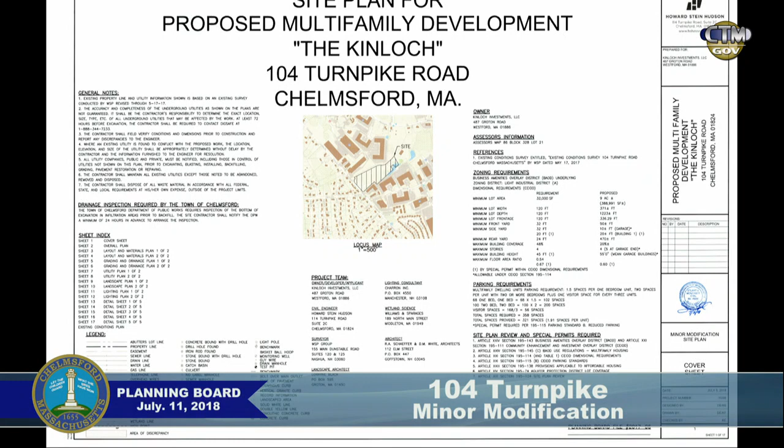All right, thank you. Good evening, everyone. Katie Enright with Howard Stein Hudson here tonight to present a minor modification for 104 Turnpike. The first and most important thing is we are now looking to call it The Kinloch instead of Turnpike Woods. So we've been working on a name and have come up with that, so we'd like to change the name for future records.

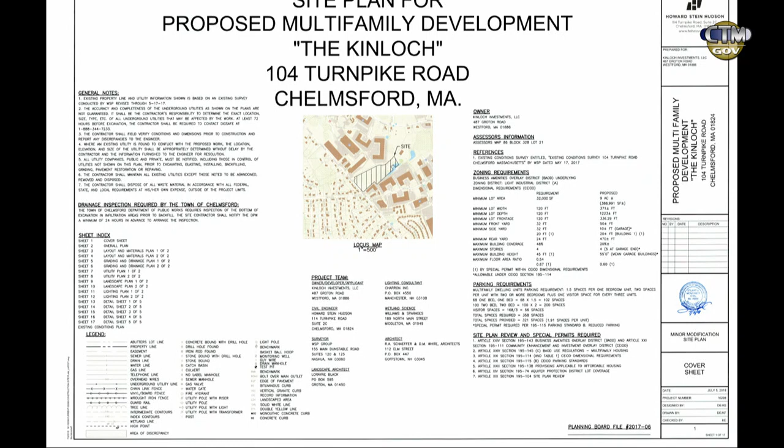Also, we have worked through some construction drawings. Essentially we've hired a new architect to work through the construction details. So there's been some minor changes to the documents related to architecture and some minor revisions related to grading. You're not even going to really be able to tell when we're looking at it online. We brought it to Evan. Evan thought it was important that the board see it and approve it in a formal manner. So just to look through it.

This is the layout that we've proposed to you today. If you flash between the two layouts, that's the one you approved previously, and this is the layout we're at now. Really minor changes. All the footprints of the residential buildings got a tiny bit smaller. The garage footprints, though, got a little bit larger. We've lost about 5 surface parking spaces, so our ratio's gone from 1.94 to 1.91. Not a very big deal, but again, we required a special permit for parking previously.

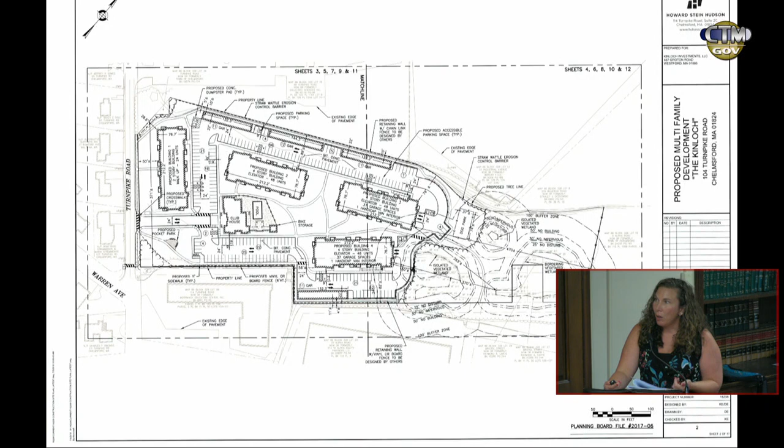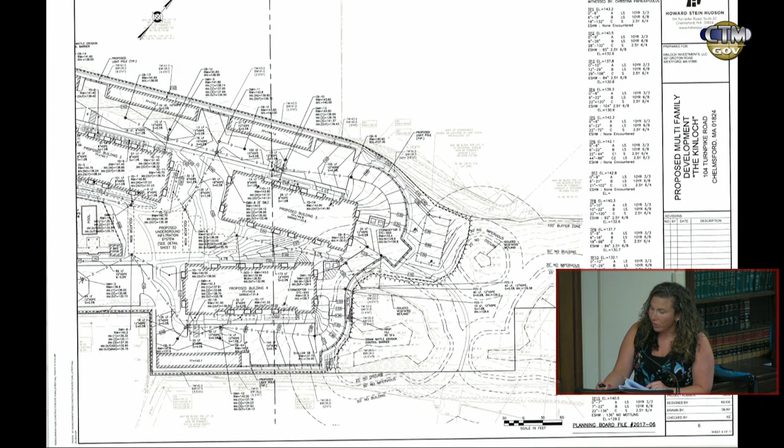The garages have gotten a little bit longer to accommodate some ADA space within the garages, and we've lost a couple of parking spaces. With the slight variations in building, we had to basically rebuild the plan a little bit, but as you can tell, it's very consistent with what was previously approved. We've also done some grading modifications, most of them at the rear here. Essentially, the walkway between buildings 3 and 4 wasn't ADA compliant, and where we had amenities on the other side of the driveway, we worked all of those grades back to make it ADA compliant in that area.

And then these are the new elevations for the buildings. So I've given you kind of what was done before. This is what was approved previously. Again, it's going to be hard to kind of tell the differences. This is what's proposed today. Different architect, different program. Materials are a little bit different, but when you look at the peaks on the roofs, the peaks are a little bit different. But again, very similar to what was previously approved by the board.

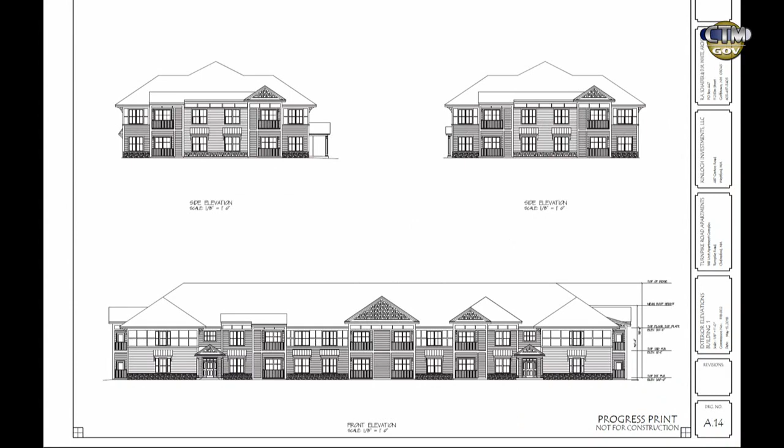Again, same thing with the 2-story building. This is the new 2-story building. This is the old 2-story building. Again, very similar. Go back and forth. They're just in different locations on the plan, so it makes it a little bit confusing. You can see there's a few less peaks on the 2-story building in the new plan versus the old plan. Again, very substantially similar.

We loved the architecture before. We wanted to move forward with that. As we're working through construction details, there's been some modifications, and Evan thought it important to bring this before the board today. And that covers it.

We gave you a very detailed rundown in the letter that called out every specific little detail. One of them, a little bit of the drainage changed, but again, the impervious surfaces stayed the same, so we might have added a catch basin here, taken one out there, a couple new yard drains. Very simple stuff that we would look to work with the engineering department upon final review before construction to make sure that engineering is all set with all the final details. So with that, I'd like to ask if there's any questions or concerns.

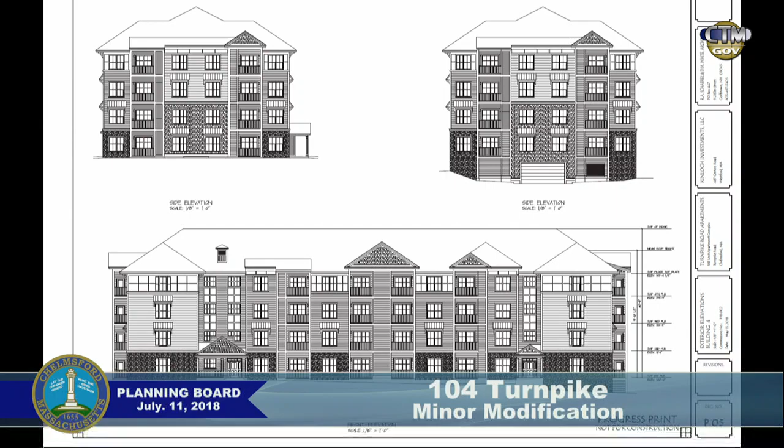Could you flash this one back on? This is the old. Yep, this is the new. Back to the old. Yeah, you've lost a couple of balconies. Katie, by chance, do you have a list of architectural changes that have been made? No, they're all very little tweaks, and I can't tell you exactly which peaks they were. I can kind of speak to it.

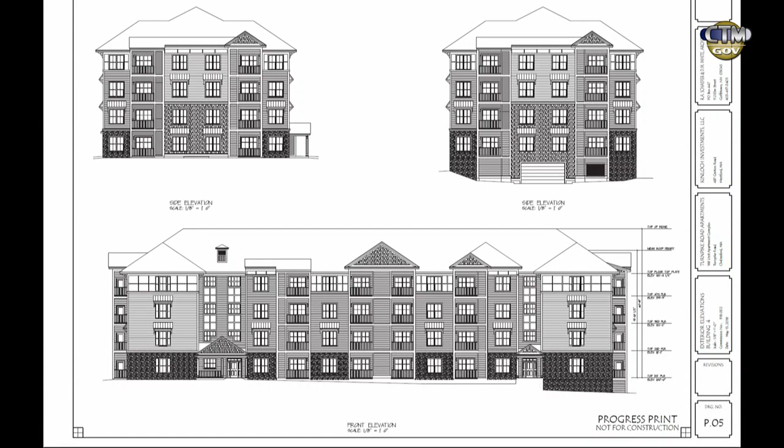Dave Guthrie, the applicant. We maintained the number of balconies. Okay, I wasn't counting right. We consolidated some gables in here. This is a double layered gable here. We kept some of the hip here. We moved this one to a shed just to kind of break up the monotony of the gable running all the way down the line. We kept the stone at the base layer. We kept the siding exposure from 4.5 back to 7.5. We mixed that up. We added some shingles up here on some of the peaks.

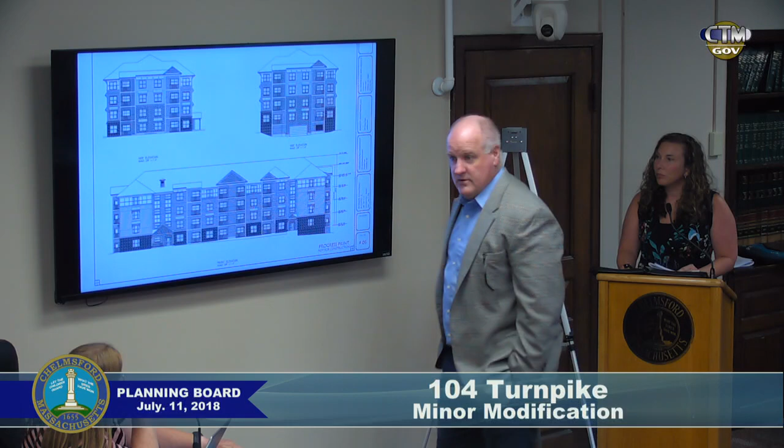There were some other miscellaneous structures up on the roof that we removed. We kept some panelization in here. We eliminated the venting system that was on the exposed face to get into more of a streamlined, modern HVAC system that allowed us to vent in a little smaller space, a little more consolidated than the big panel there. Gotcha. Sort of subtly slid it from 1899 to 1911. A little bit, yeah. We still kept the hoods. We were fond of the hoods, and we felt like the board may have been fond of the hoods.

Yeah, I think maybe they were there previously. We kept that standard, we kept that stuff in there. It's very subtle. So a lot of the features that were on there before we liked. We just needed to get rid of some of the undulations in the building a little bit. Okay, that's fine. This architect gave us a chance, we love the old architect, so let's not say anything negative there.

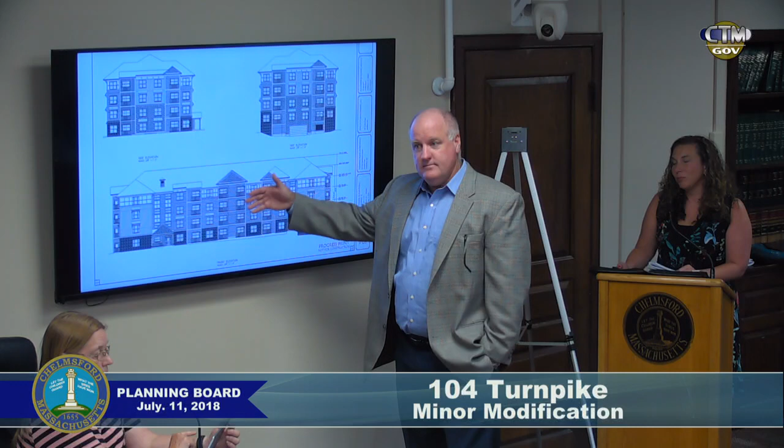This architect gave us the experience in stacking units over each other. So if you have an A1 here, or let's just say a two-bed in a certain style here, it's standing over a two-bed certain style right below it, so our plumbing lined up a lot cleaner. That makes it easier. It just simplified things from a construction standpoint. When we went out originally with the conceptual plans that were approved by this board, some of the construction numbers came back substantially higher than really was feasible.

They had suggested a couple architects, we interviewed them, we picked one, and sort of streamlined the process. All right, gotcha. We certainly tried to maintain or enhance most, if not all, the architectural detail that I think the board liked, while creating some construction efficiencies. Well, I've had my say, so let's hand it around.

You want to take a shot? The building heights are the same? Yes. Thank you, I'm all set. I'm good. There's also some shifting of driveways and rows, shifting at all? Yeah, very little. The front building had an overhang that went out a little bit further than the previous building, and we wanted to maintain the 50, so that pushed back a little bit. But we're talking a couple feet here and there, nothing substantial. So there's been a little bit of tweaking. Essentially, we rebuilt the same site plan with the new buildings.

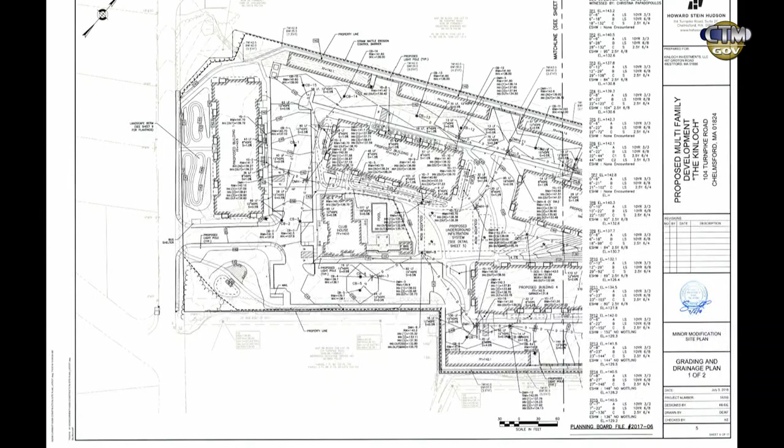And in addition, you're also seeking a waiver of the fee? Yes, please. Tim? I'm good. Henry? Landscaping plan staying the same? So it was changed a little bit just because it was tweaked. I had Lorraine work all the way back through it because the doors changed location, which means it screwed up all the plants around the buildings. So she rebuilt the plan around the new doors. And because the door at the front building that we wanted access out to Turnpike also moved, we split the berm in two. So there's now two berms in the front with the walkway in between them rather than having one long berm and the door at the end.

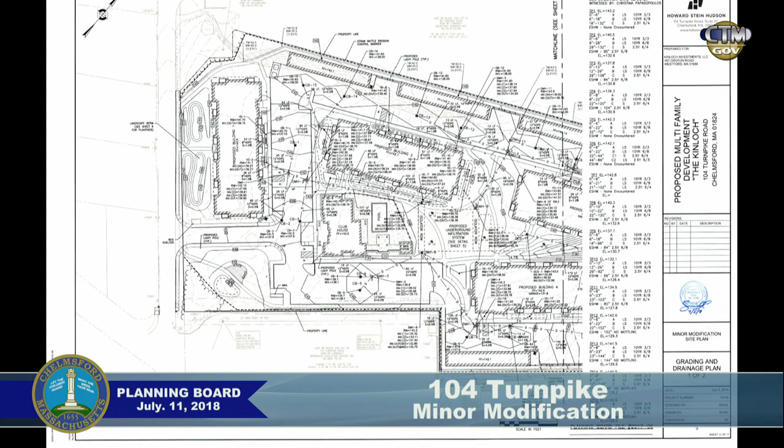Gotcha. So we had her replant the whole thing in the same style as she did before, shifted a little bit. No fewer plantings? No. Nan? I'm looking. And the lighting and everything stays the same, correct? Exactly. Has Christina reviewed the changes in the drainage? No. Is there any change in the drainage? It's really little minor tweaks. So I prepared a letter. Basically, I can just read it if you want, or do you want me to summarize?

So I received the plans, and a technical review of the site design and stormwater design is not complete. This office has no major concerns with the proposed revisions due to the minor nature of the modifications. Please consider making it a condition of approval that the applicant must revise the plans in accordance with the requirements of the engineering division prior to receiving a building/foundation permit. Okay. Any other commentary? Anybody? Question. Go ahead.

Katie? Yep. Can you save me some effort and tell me where the pin oaks are? Oh gosh, no. I cannot. You know the drill. I have no idea where they are in the plan.

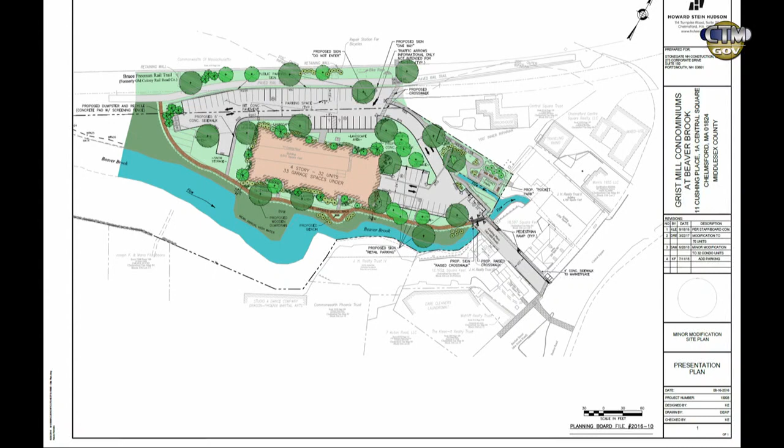The previous approval was for 70 apartment units at 4 stories with an underground garage, making it a 5th off of Cushing. The new project is the same exact height as the previous approval, so we don't need any additional relief for that. The plan also provides all of the same public amenities: the same landscaping along the bike path, same number of parking spaces along the bike path for visitors and the public, and the same amount of spaces for Jack's retail spaces out front, following the license agreement for the 19 spaces closest to his retail units on the bottom.

We're also providing a slightly larger parking ratio for the number of units, and decreasing the impervious square footage from the previous site plan by over 19,000 square feet. So there's a significant amount of green space on this project. We've kept the building the same distance from the brook. The brook walk is in the exact same place with a few minor tweaks. Because we didn't need as much parking, it's connecting to the bike path a little sooner than the previous proposal, but essentially the flow is the same.

The traffic is obviously significantly reduced from what was previously proposed. The traffic flow is exactly the same. The improvements to Cushing as part of the MassWorks grant, exactly the same. Connectivity to the Central Square area is exactly the same. The Pocket Park is exactly the same with the walkway, and the landscaping has been substantially increased due to the amount of green space on this plan.

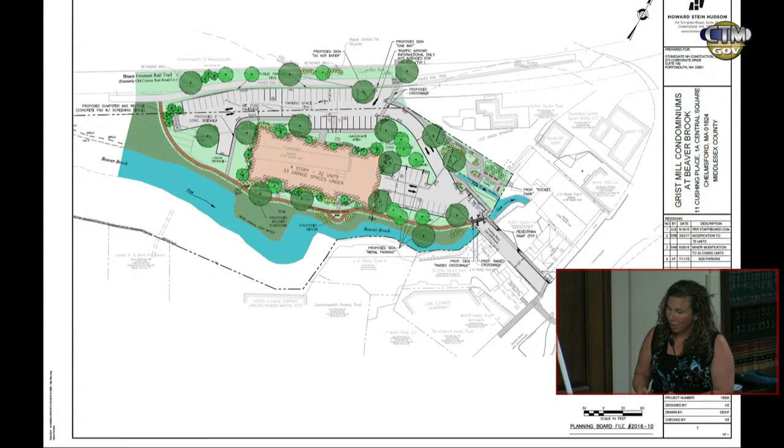We were given the approval for a $360,000 inclusionary housing payment, and we are not going back on that; we are keeping that as the contribution for this project. Obviously, the 53G money will go down a little based on the number of parking spaces. There's still the $10,000 fee related to police and the improvements in Central Square. It's very much substantially similar to what was previously proposed. It's just gotten so much more open, green, and walkable. The grading is essentially the same. The drainage is essentially the same.

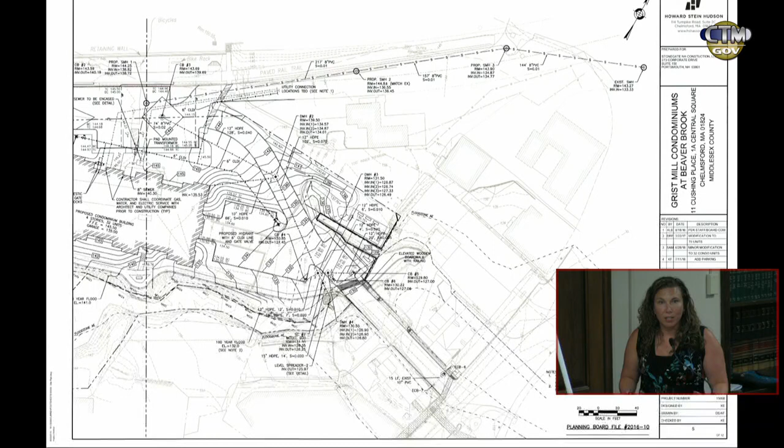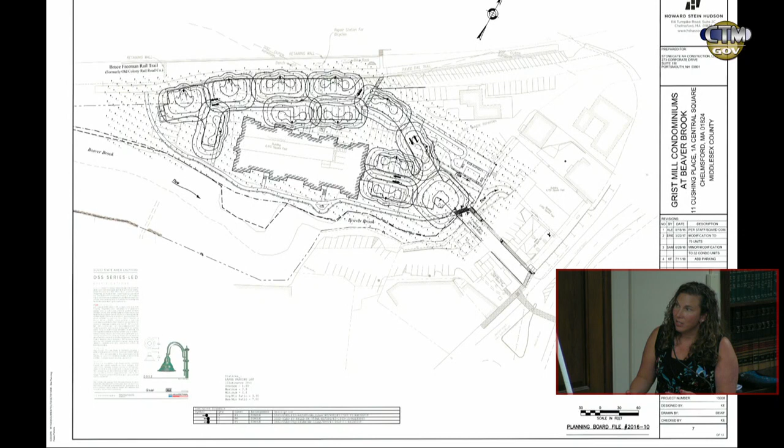We're substantially decreasing over existing conditions the amount of impervious on this site. We're almost 20,000 less than the previously approved plan, which was less than the existing condition out there. So obviously we're substantially improving the site. There's a significant amount of landscaping. The lighting fixtures stayed exactly the same, and the lighting's been adjusted to the new layout.

This is the new building we talked a little bit about previously. It is different than the previously proposed building, but it has a lot of very similar elements. When you talk about the style of the building, the building itself still has what we had first approved for Grist Mill, which was a sloped roof. We ended up with a mansard roof. This accomplishes a sloped roof without the mansard roof and fits within the height requirements that we were previously approved.

Where the mansard roof elevation before, the roof grade would have been from the deck of the mansard roof to the ground. Here it's actually to the mean, so the building itself will feel shorter. The windows on the building are 4/1 and double hung. You'll see there's some horizontal siding elements here. There's some cedar-like shingles on this building. There's architectural shingles on the roof. And there's some stone at the front entrance and also at the garage entrance. So a lot of very similar features to the previous approved building.

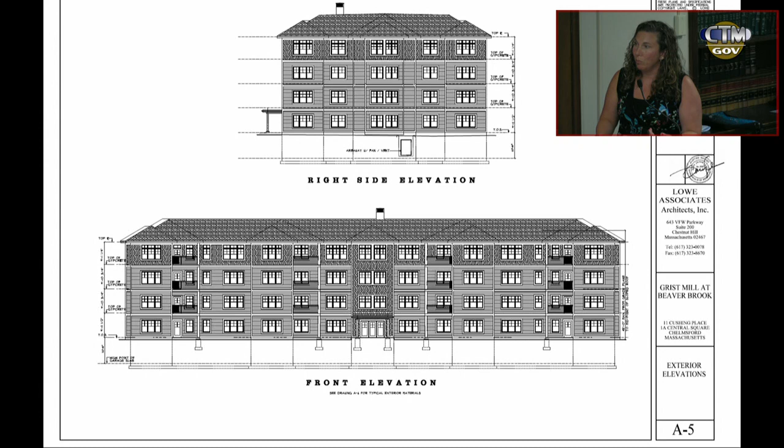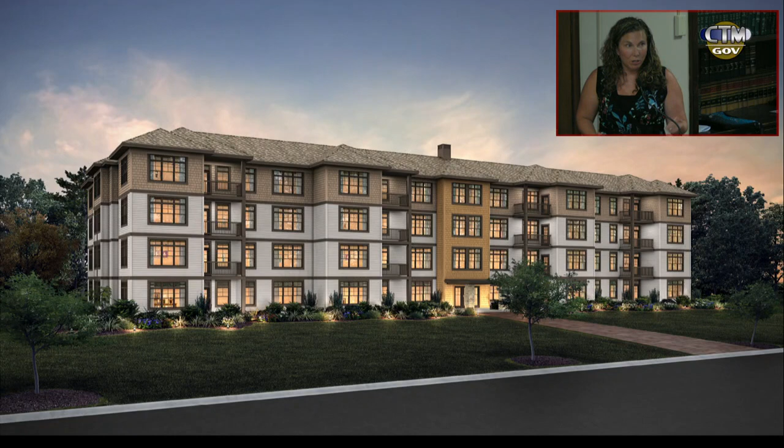It's also changed slightly in color, as you can see. It's a lot of earth tones. This is a project that Jay and Eric, who were introduced to you previously with Stonegate Construction, previously had approved in both Portsmouth and Stoneham. So this is a building they're very familiar with, which is why the value is there. They've built this building many times at this rate, so we are able to make the construction numbers work out here. So this is the building.

You can see it's a lot more earth tones. It'll blend in with the natural environment that'll surround the building and also the brook to the rear of the building. All units here are 2 bedrooms. Some of them have a study, some of them do not. And I believe that's it. So we're really trying to keep it as minor as possible. We do have letters.

So we do have the whole team here tonight. If you have any questions, I know you recognize Adam Winstanley and Barbara Green, who were here quite a bit in the previous 2 approvals for the project, Eric Cates and Jay Fittingham, who were here a month or so ago when we introduced you to the project in a preliminary fashion. So let us know if there's anything we can answer. Thank you. All right, why don't we get the letters read, and then we'll pass it around for questions.

Community Development Director, no concerns, but note modification is defined in section 410 of the Planning Board Rules and Regulations. Fire prevention, no concerns. And then Christina Papadopoulos: dear members, this office has received the site plans by Howard Stein Hudson Associates, consisting of 12 sheets dated August 16, 2016, revised through July 11, 2018. Cover letter dated July 5, 2018, revised July 11, 2018. Supplemental data report dated November 2, 2016, revised July 11, 2018, and architectural floor plans dated July 3, 2018.

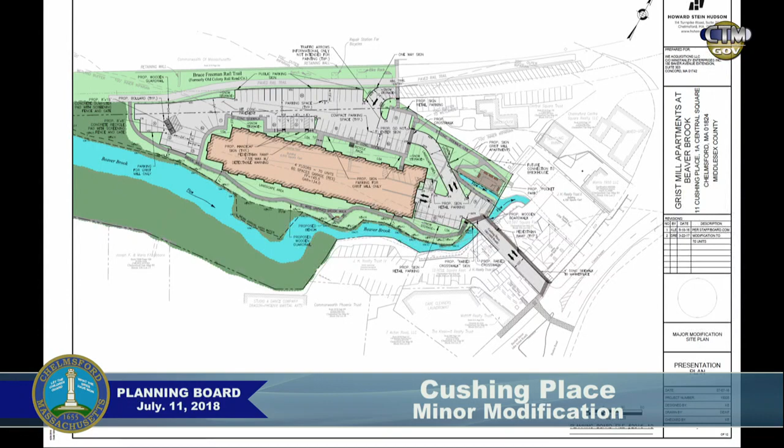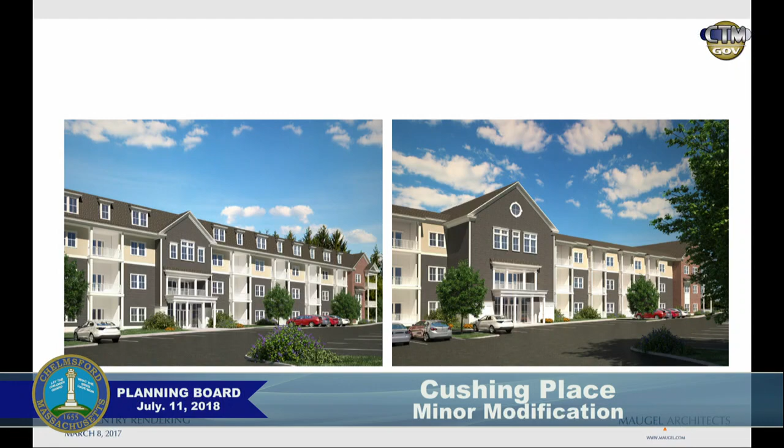Connecting to the pathway - do you have the architectural drawings for the original approval? I just have this rendering. Okay, so that was the 70-unit building on the left, and that was the mansard roofs, which matched the central house a little more. This building here that was previously approved at 70, the building height was approved to here. In the new building, that's the mean roof. So this was the height previously approved, right there on the 4-story building. That's the same height as here now.

So the mansard roof, the definition of building height - what you're actually saying is that the actual peak of the roof is now lower than it was on the original approval? Correct. By how much? I didn't do that math because it's not the definition, we were going by the definition. I understand we're talking regulation versus visual impact.

So the floor to ceiling height is a little bit less than the previously approved plan. How high are your ceilings in this building? In this plan there was 8 feet on 3 floors and 9 feet on the top floor. So they're shorter.

And the overall scale of the building too, due to the length differential from previously. So instead of seeing 4 stories over the length that was previously approved with the mansard roof, you're seeing it a lot shorter, because the building actually got wider and significantly shorter than the previous approval.

So tell me again, what are you proposing for the payment for the inclusionary housing? $360,000, it's the same as before - same as the approval, which we went up by $80,000 at the 70 approval. I just wanted to hear the number.

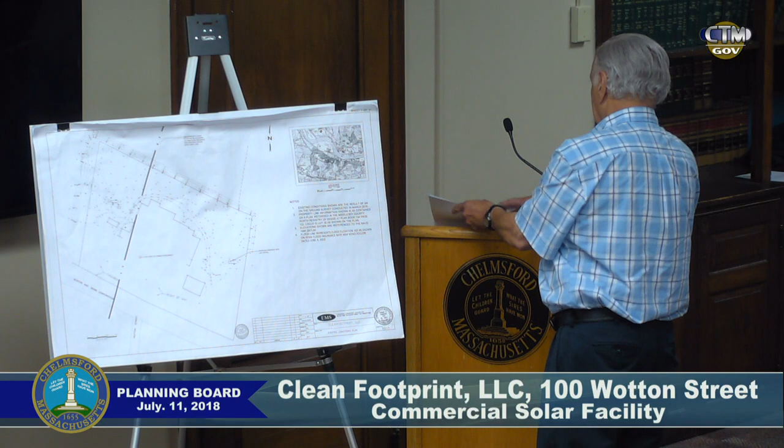It's a very strange situation because the compensatory flood storage has been done a certain way for many, many years. When you have a site that is going to use flood storage, for some reason you usually excavate part of that site, and we basically proposed that on the lowest end. The floodplain is at elevation 102, and we're basically at, I think, 95 to 98 across the site.

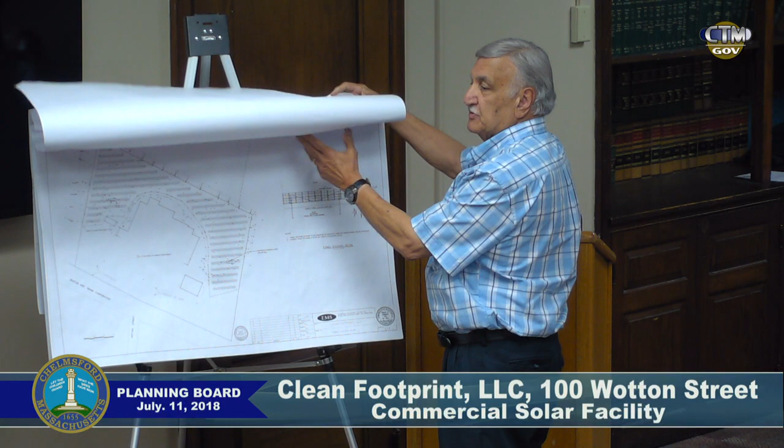Which means that in a 100-year flood, in order to do compensatory storage, you have to calculate how much you're losing. It's best to show you here. The only thing you're really losing is these pilings, which have a certain footprint. So the calculation that was done was to take that area and take it up to the edge of the solar panel, which is by design above the floodplain.

So it's like you took a column and calculated that cubic footage, then multiplied it times the number of pilings—there's about 331 of those. They're at different elevations, so some of them you take, and it came out to, I think, 10 cubic yards, and we provided the 10 cubic yards on site. That's normally how we've done it for the last 25 years that I've been an engineer. Somehow DEP has come up with some kind of formula where they want you to provide the compensatory storage where you're reducing it.

Now picture that—that would be a hole around the piling, literally. I'm glad you're explaining this. So when we were at the Conservation Commission, two of the members looked at our engineering report, understood what was going on here, and found that to be, I think, a little bit profound.

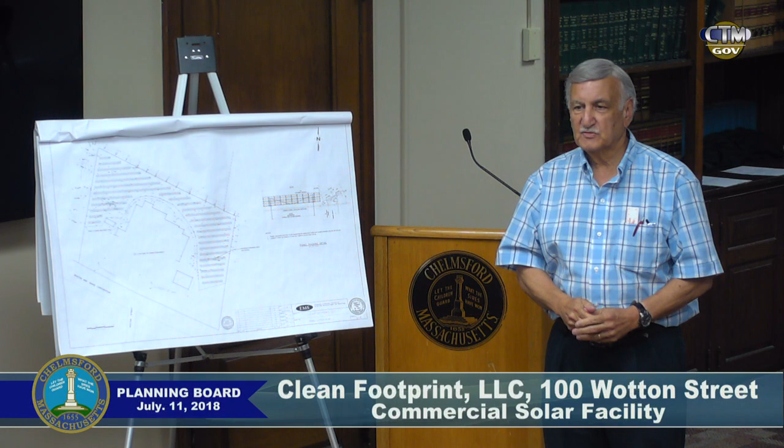There used to be a squash field down there back in the 60s and 70s. Squash, huh? There was squash and cabbage on that site. I'll be darned. Pulled many a weed there. It's wide open. It's the new style.

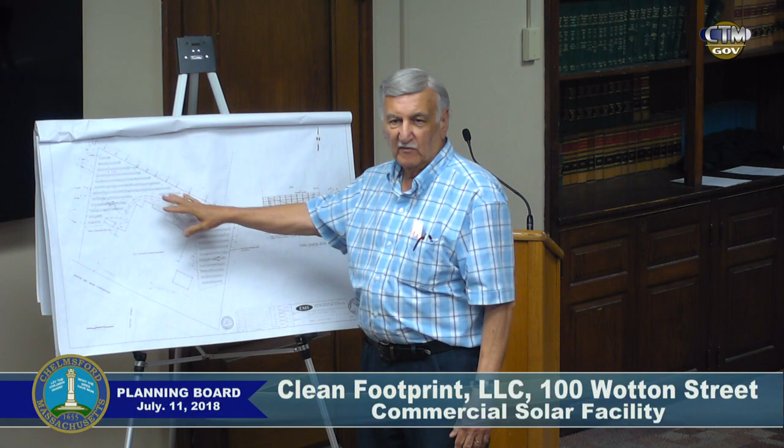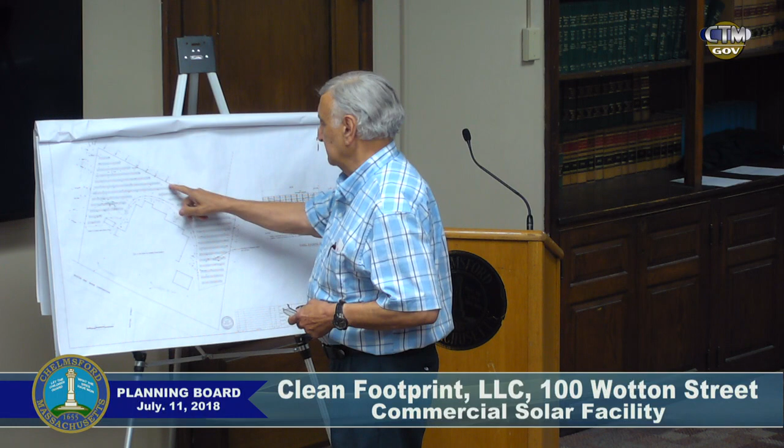So it's a good site for that. It's out of the way. All right, back to business here. Are we fencing this thing? Is there a fence shown on the plan? Is this all fenced according to our regulations? We're showing a fence, yeah, this little crosshatch. Along the river all the way around. Right, all the way around, here it is.

You're presenting this plan to us tonight. Oh, no, this is the old plan. That's the original. Okay, well, you should show us the new one that we're gonna vote on. We had it up there on the small sheet. All right, Colleen has a new plan. If I could, I'll show it to you. I got it on my computer. Oh, okay, good. I'm trying to get to a point. Go ahead. The easement is super important.

That easement, I believe, without reading it, is the back way into Williamsburg. To the left of that, the school is down the ways a little bit, but you've got the Williamsburg condo development. And that is to provide a secondary access in case the track is blocked at their main exit. So that right-of-way, and the only way I would vote for this plan is if you maintain an opening there for them for a right-of-way. It's never happened in 40 years, probably will never happen in the next 40. Not just an emergency gate, you want it open. Yeah, it's gotta be open.

Your new plan does no work within that easement, right? Basically pull the fence in, move the fence over. There won't be any panels or any fence in the easement. Fine. So I don't think we're blocking it. Right, you're doing nothing in the easement. I don't want you to block it. And that could be a condition. Yeah, I think we probably have to do that. It has to be open for Williamsburg. Okay.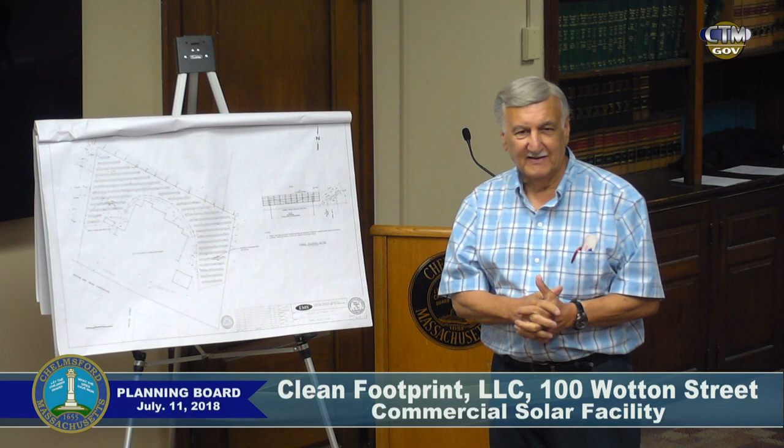There's a fellow who oversees GE Solar's projects, even though all their project managers are out of Connecticut and New York, but I work directly with him, his name's Matt Benisco. I'm sure you could contact him through GE Solar. They are looking at sites, I know. If I give you a call tomorrow, can I get some numbers off you? Well, he's got the card right there. Yeah, we've got your card. Also my email is on it, if you just want to email me and I'll email you back. Okay, very good.

Got it. Okay, the only other thing that I see on here is we have one set of meeting minutes that's been handed out, June 27th. I didn't see it before, and I apologize for that, but I figured it was short enough that maybe you could just look over it. Why don't we give this a quick look? I already looked at it. Looks fine to me. That was a quick meeting. Comments? I'll make a motion to accept. Second. All right, motion and second, all in favor?

Aye. Approved. Is there any other old business or new business that we need to deal with at all? I think I'll make a motion for you. You will? Yeah. Adjourn the meeting. Second. Aye. Again, thank you very much. Thank you.